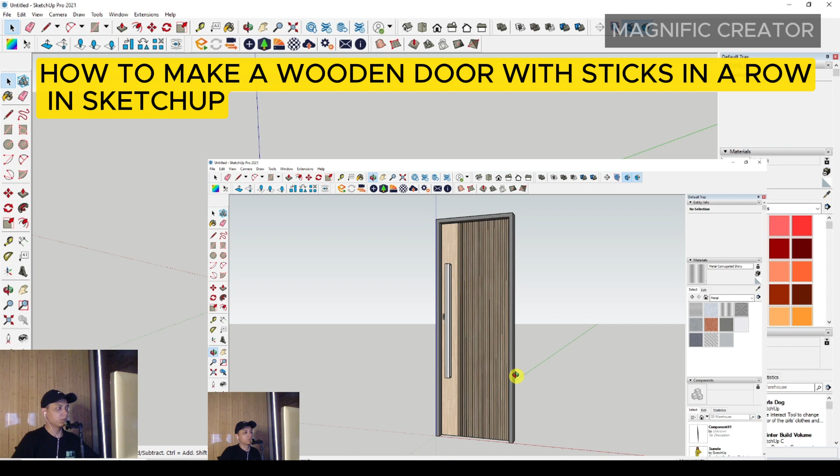In this video, I would like to share with all of you how to make a wooden door with sticks in a row. First, you have to make the basic frame of the door with a line, then position it on the origin. Then you can set the height of the door.

It's around 2500 millimeters approximately for the height. Then you can set the width of the door at around 900 millimeters, and complete the frame.

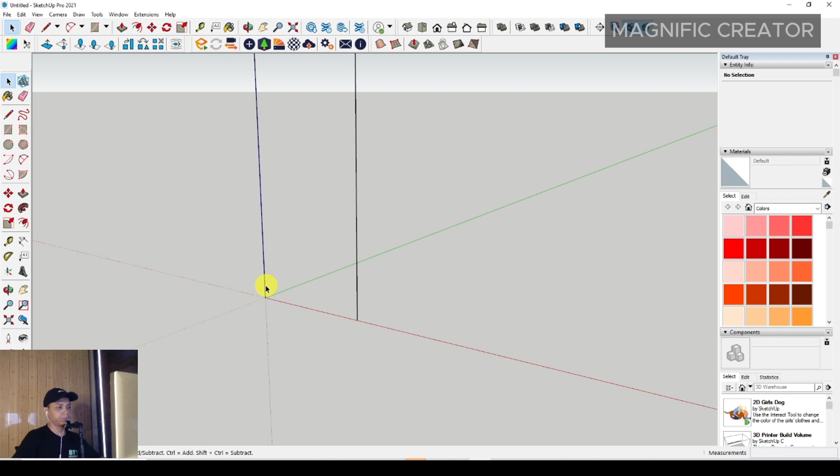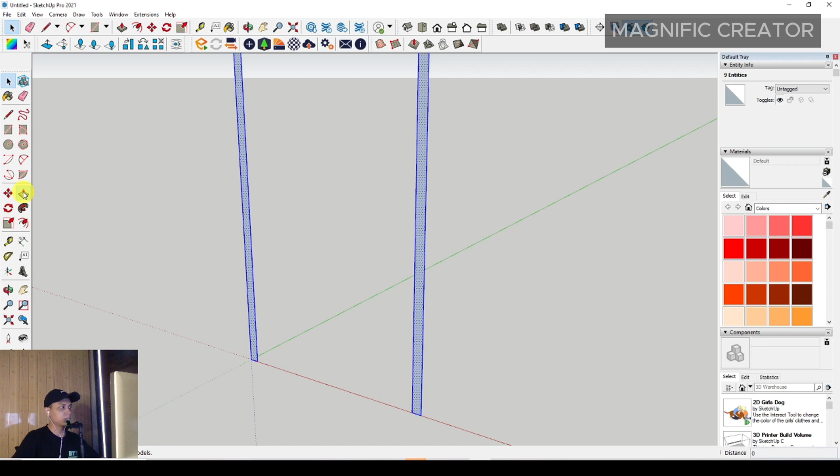After that, you can offset this basic frame to the inside around 40 millimeters. Then you can select the line and complete the basic plan of the frame of the door. Then you have to erase it, and push it back around 120 millimeters.

You can get the basic frame object of the door, and then make it a group by triple-clicking on this object, then right-click, and make it group.

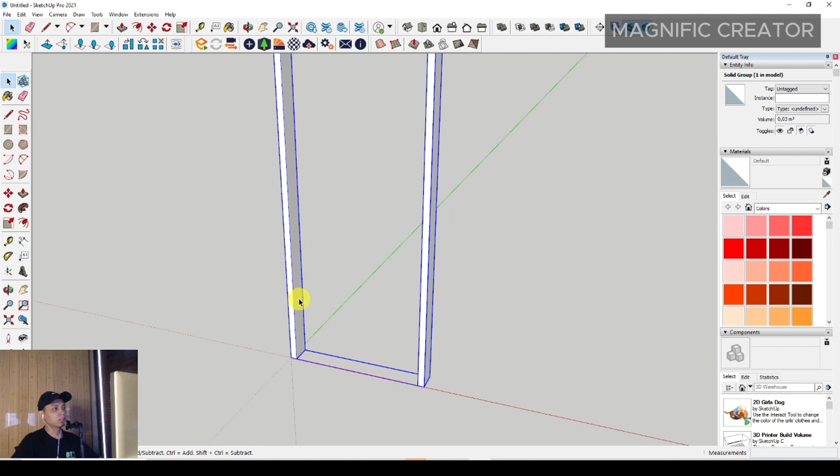After that you can make a door leaf with a rectangle in this area. Select the rectangle tool, then position it on the endpoint of the group, right here, following this step in the video, on the endpoint in the group also. So you can see the rectangle.

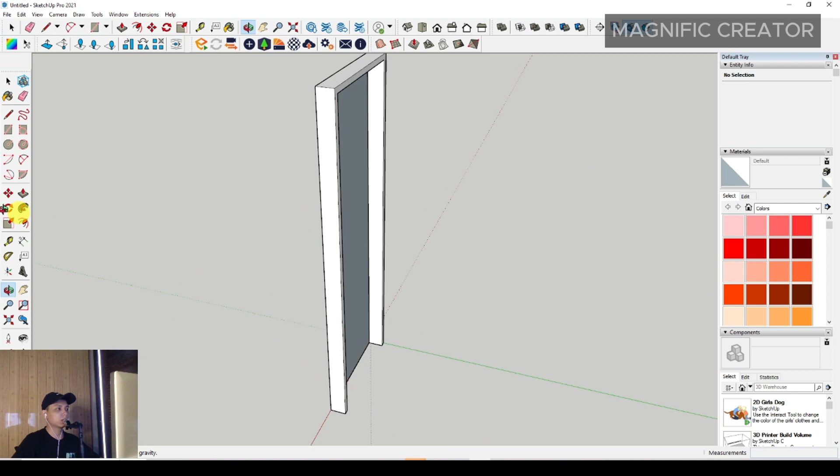After that you can push it to the front around 40 millimeters. Then you can see the rectangle as a solid object, and you can right-click and make it a group.

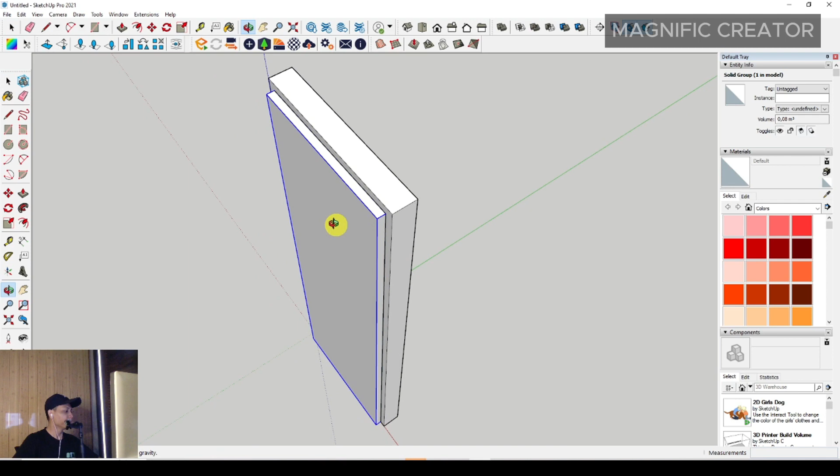After that you can adjust the arrangement of sticks in a row of this door leaf by selecting the tape measure tool. Then you click it with left click, and position it by clicking on this edge of the group, and drag to the right side.

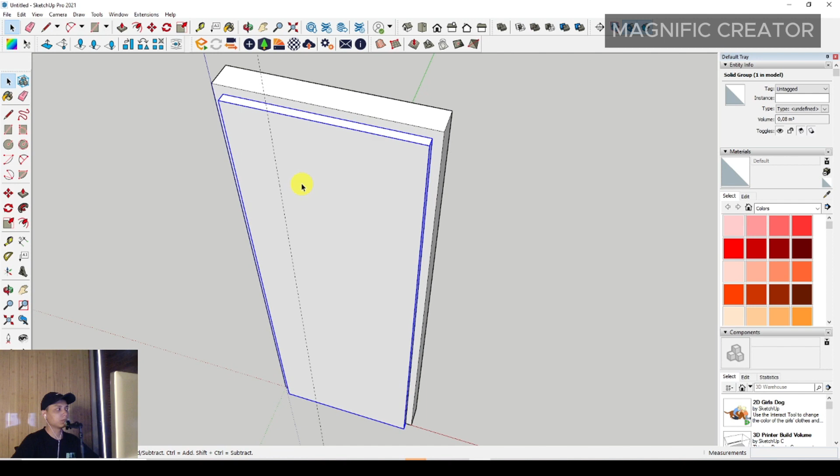Maybe it's around 200 millimeters, and then you can see the guideline that would guide you to make the arrangement of sticks in a row of the door leaf.

Then you have to enter the group by double-clicking. Then you can draw the line right here, and then just click this area.

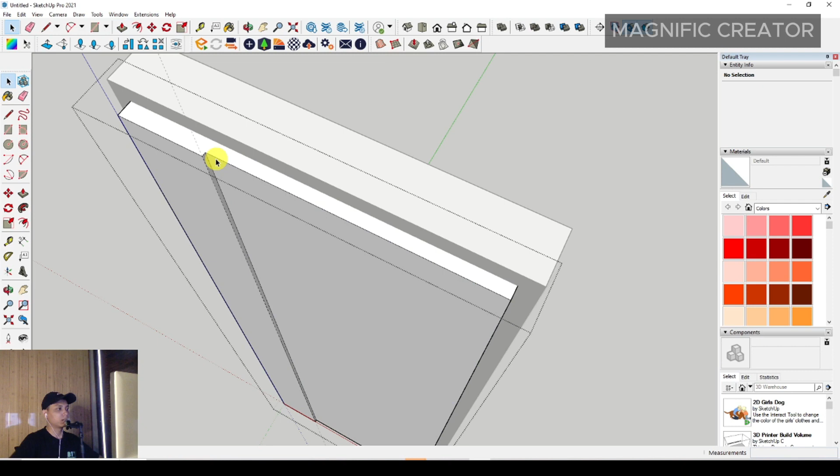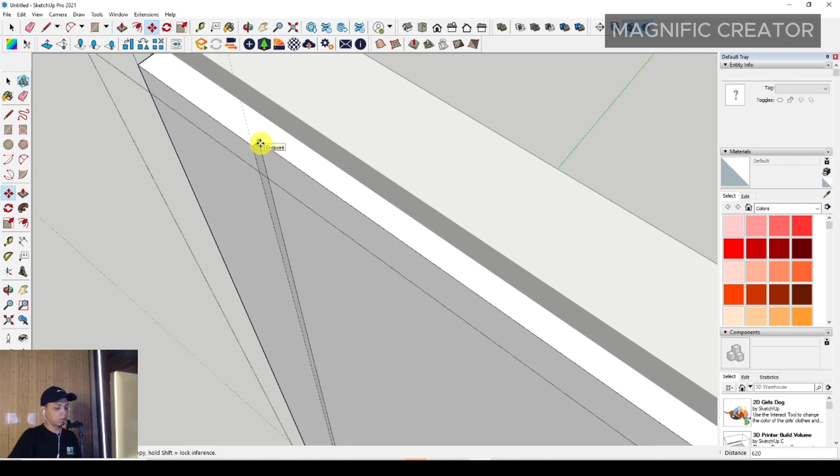After that, you can select this line, press move, and press control on your keyboard, and set the end position as shown in this video. Click with left click, then type on your keyboard. Maybe around 50, slash, and enter.

Then you can get the grid automatically arranged based on the line that you made before.

After that you have to use the push or pull tool to make each stick arrangement manually, making sure it's equal with the other side, another surface.

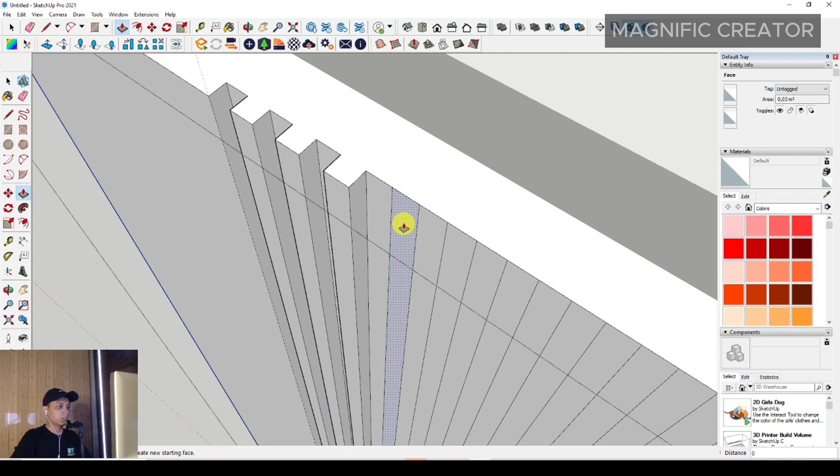If you have already tried to push or pull on one surface, you can just double-click on another surface, so it will automatically extrude with the same length as before, by following this step.

This step will happen automatically, making it quicker to create this arrangement of sticks in a row.

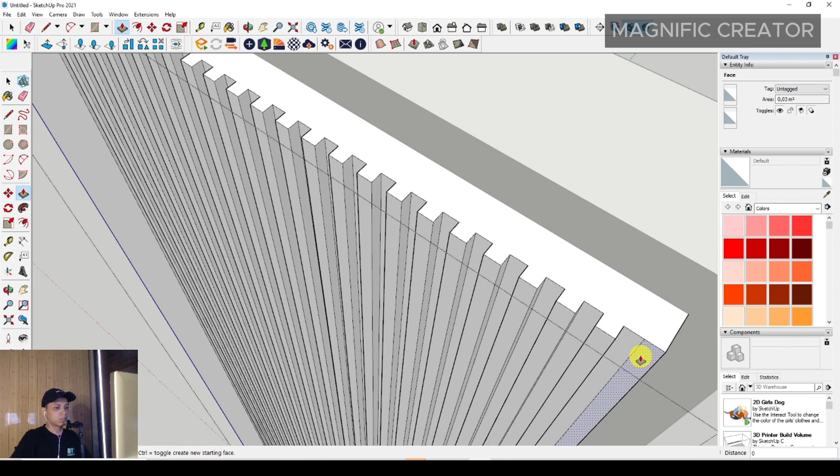So you get the 3D object on the door leaf. After that, you can select the material in this Synthetic Surfaces, and select the Formica Laminate Light.

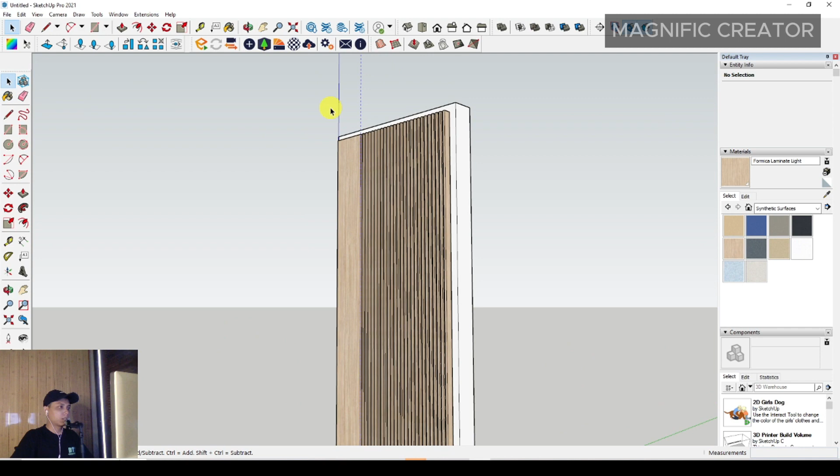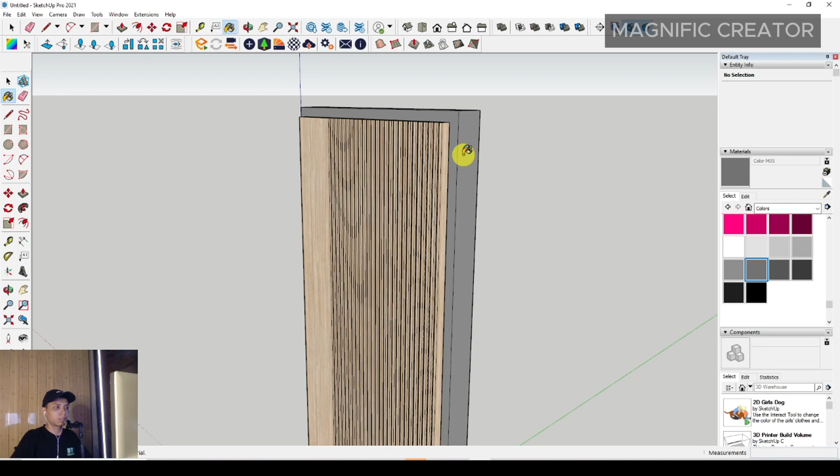It will be more representative or realistic. Then you can select the dark color of the frame using color M07, or if you feel it's too dark, you can adjust to a lighter color like M05.

Then you can select the rectangle to make a door handle. Making the door handle depends on your taste and the design of the door.

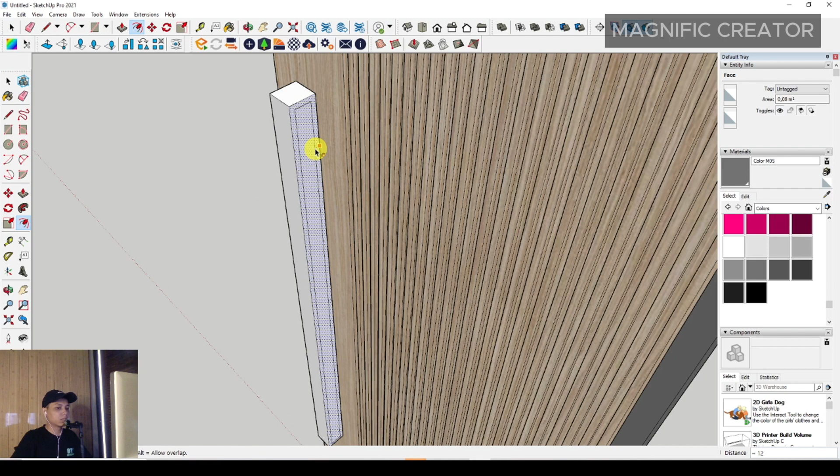After you have made a solid surface in this area, you can offset it inside, maybe around 12 millimeters for the thickness of the offset, and adjust it by offsetting, then push it to the back.

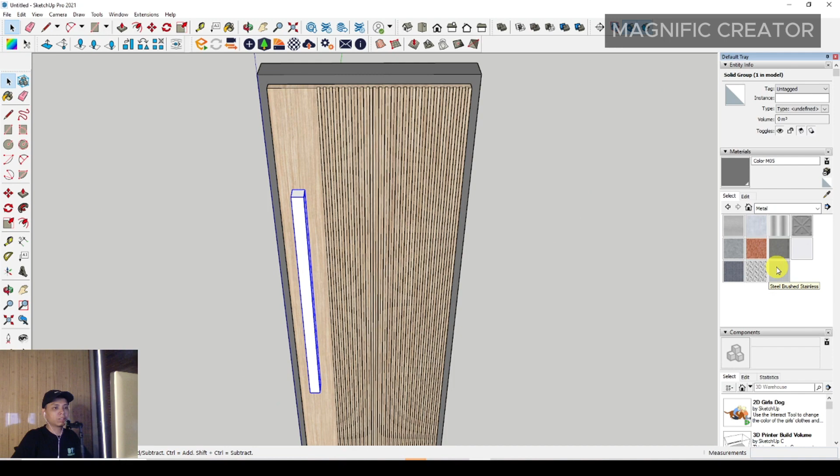Then you can make it a group, and after that adjust it with metal material, something like this.

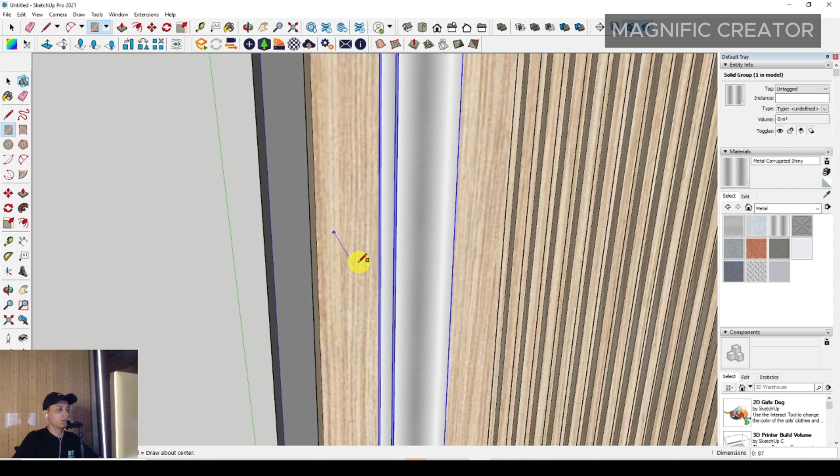After that you can make a lock case for the door, maybe using a circle—sorry, you can use a rectangle object—and then make it a group.

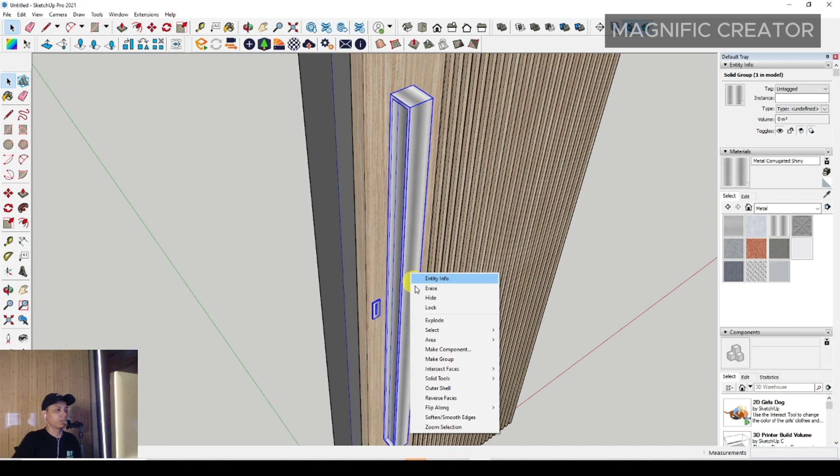And you can make another hole right here. Then give it the same material, and make it a group.

I'm sorry, you have to push it to the front first. You have to offset it maybe 20 millimeters more.

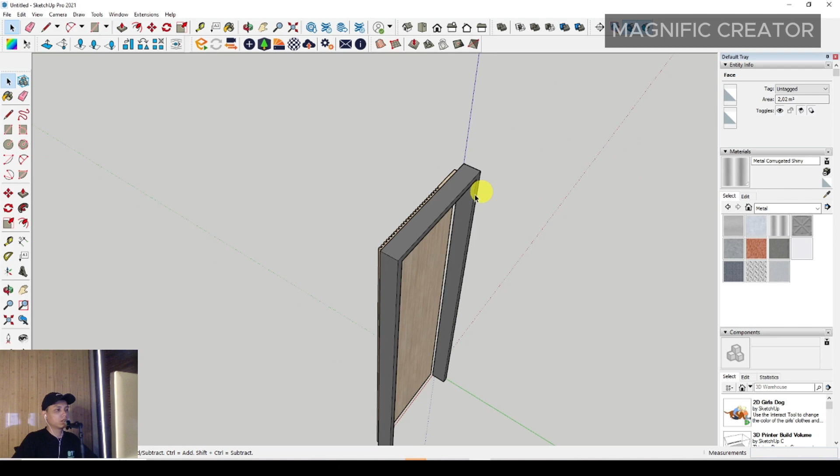And then you can make it a component. Just create it, then move and press Ctrl to duplicate it along the green axis, then right-click and flip it along the green axis so you can adjust and combine it to the appropriate position.

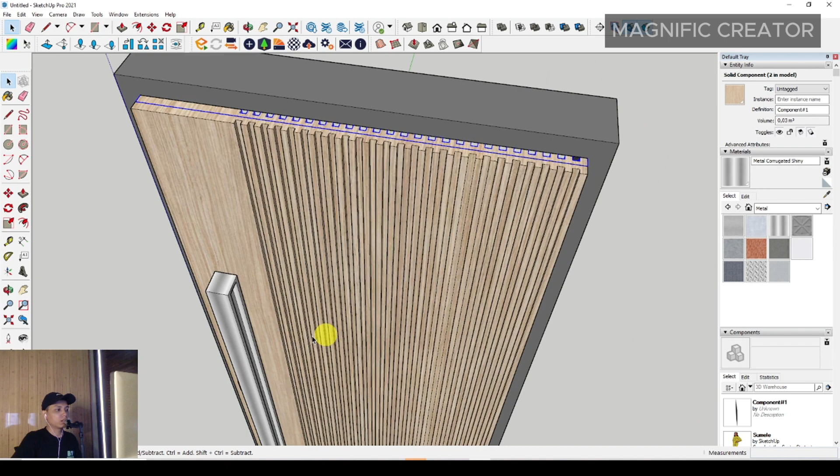Then you can make it a component on the flip side: click the object, press move, press Ctrl, drag along the green axis, and flip it along the green axis to complete this step.

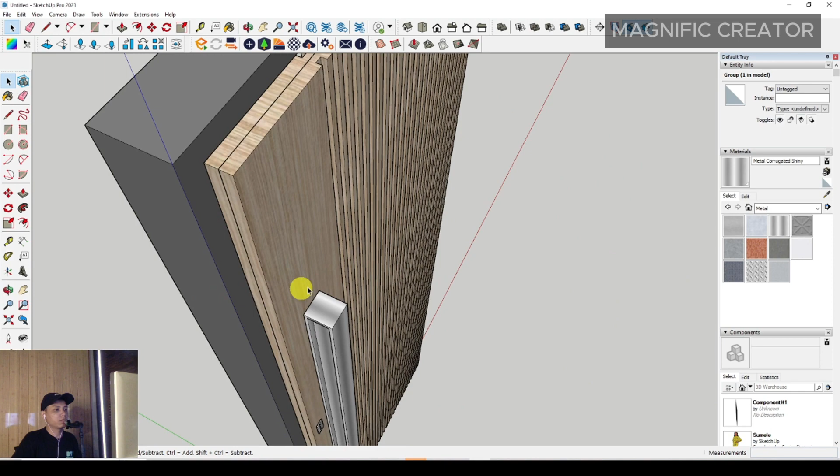Then you can position it in the appropriate position. Then you select these 4 objects like this, and make them a group.

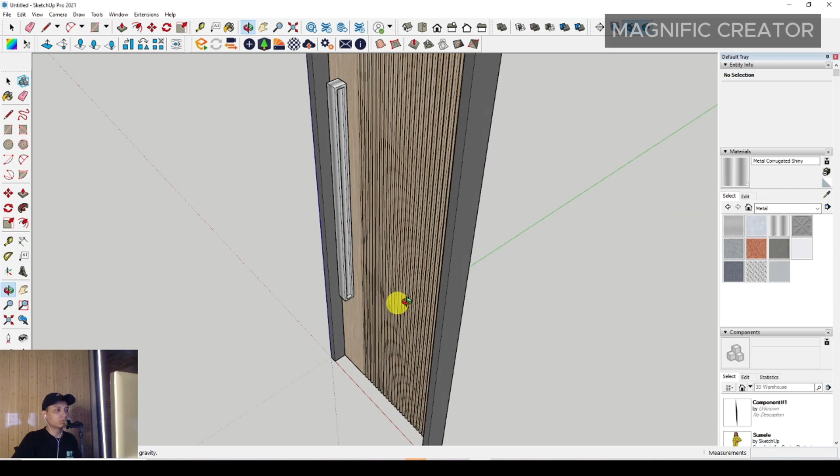You can position it on the correct position on the frame, so you can see the door design. So you can see the complete door design with sticks in a row.

I think it's enough. Thanks for watching. I hope it is of benefit and advantage to all of you, and wait for my next video. Thank you.